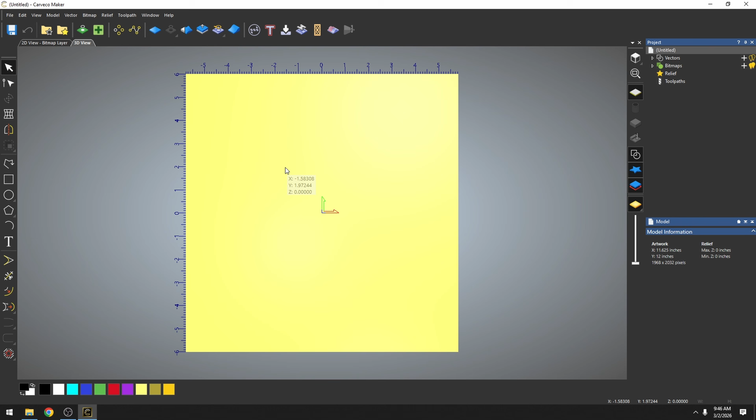Now we're just going to import our 3D model. To do a two-sided carving, you have to use a model that has two sides, so you're going to be importing something that has two sides or is a full 3D model, like something you might use for a 3D printer. Just going to import our relief.

Okay, and then when I import my model, this particular model came in standing up. I'm just going to hit this little material back here so we can kind of see. Now these are all the sizes down here. We're going to have to sort of rotate this around.

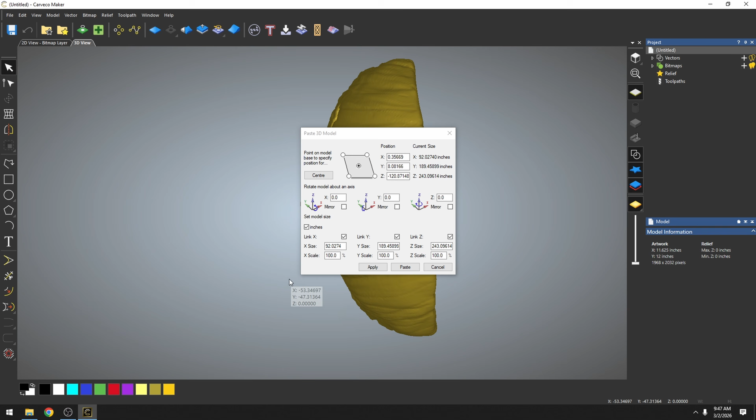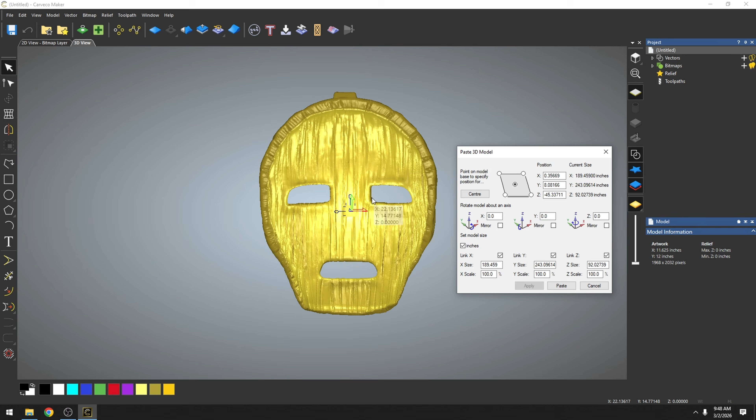Right now the model, if I move this little window aside, is standing up tall, so I need to rotate it around. These three boxes in the middle are going to allow us to rotate this around. The first thing we're going to do is rotate this 90 degrees on the x-axis, and now 90 degrees on the y-axis, and that flipped it over. Now what I want to do is flip this all the way over, so let's go 180 degrees.

Now what I want to do is start to size this down to our material. So we're going to go to our long edge and put in 12 on the y-axis, and I'll just hit the center button so we can put this in. Now my mask had a very specific size -- it's going to be 8.5 inches tall.

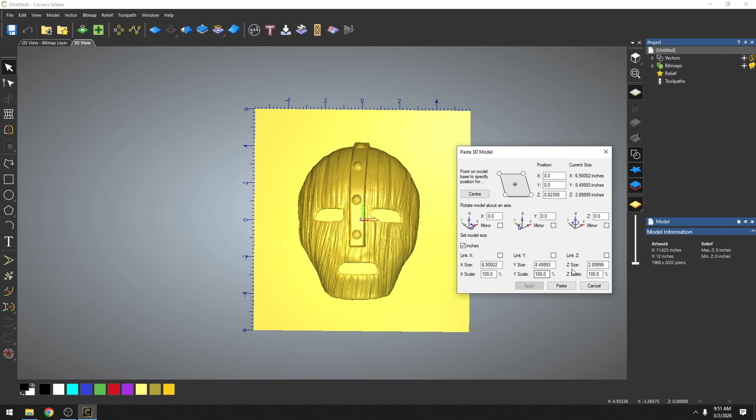And I want to uncheck these boxes. I'm going to make it 6.5 inches wide, and we're just going to be under 3 inches, 2.9 inches tall. We're doing the 2.9 so that it will fit inside of our material.

Now it does look slightly off, so let's check this out. Let's roll this over. And indeed, our mask is not perfectly centered, or it's not perfectly aligned to the material. Well, let's hit the center button and we'll get it down. So it looks like we're going to have to do a little bit of moving or rotating. The first thing it needs to go is left and right, which is the y-axis.

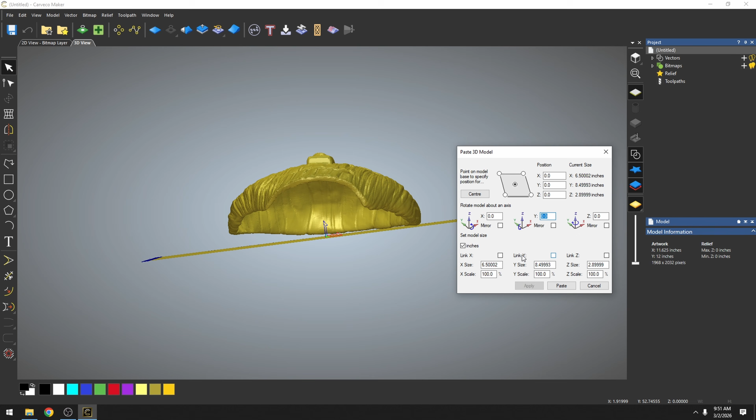Let's try some really small degrees, like 2 degrees. You can see we're rolling it around there. I need to come some more. Let's go another 2 degrees. We're getting it pretty even. It needs to roll down some, so let's use 2 degrees on the x-axis.

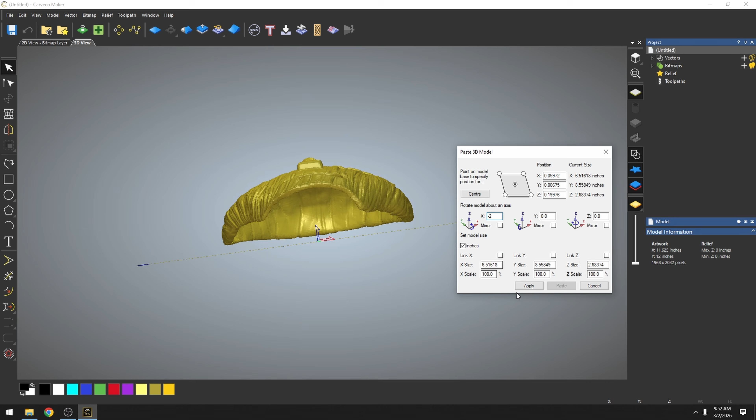That went the wrong way. We're going to use a negative -- negative 2 degrees. Let's go -4. Okay, let's do -2 some more. All I'm trying to do is flatten this out where it's sitting a lot more level. Let's hit our center button.

Now let's zoom in here. This is touching, and this is not, so it needs to roll this way just a little bit. Let's try 1 degree -- we're past it here and we were over here. So let's go back and I'm going to put a -0.5 degree and let's center it. We're almost down here, we're touching over here.

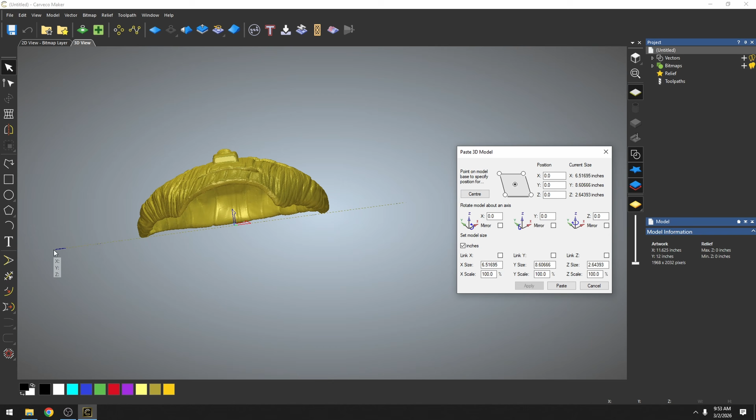So let's do half of that. Let's go -0.2. Center. We're touching here, we're not touching here. Let's go 1 degree -- 0.1, 0.1, center. Touching here and we're touching here. So that's how I know that this mask from left to right is about as centered as we can get it. You can kind of turn it this way.

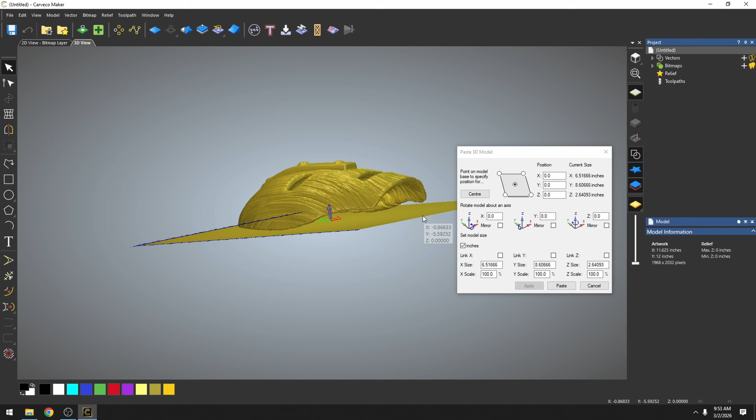Now what I'm going to do is try to get this a little bit flatter by making this touch. So we're just going to adjust this a little bit. Let's go with 0.01 -- I didn't even see it move. Let's try that again, 0.01. Let's try 0.5, let's go just a little bit more -- 0.2, another 0.2, and let's hit our center button.

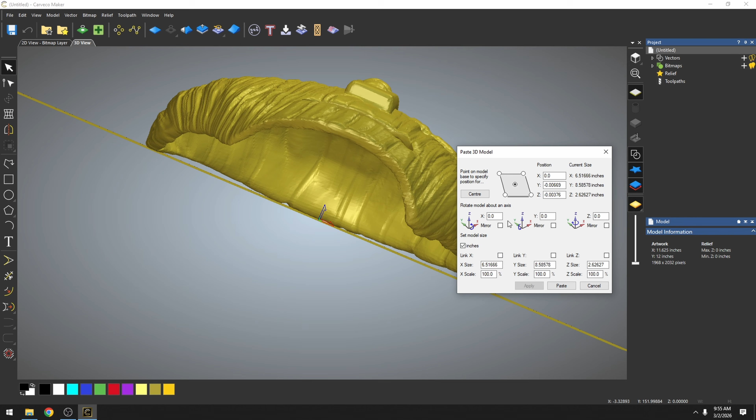So the back of the mask is touching and the two sides of the mask are touching, so I feel like I've got this pretty centered. It's sitting on about as flat a plane as I can get it, and so we'll carve one side and then we'll be carving the other side to match. Okay, and then once I've got this exactly where I want it, we need to go back over here and make sure that our sizes are correct.

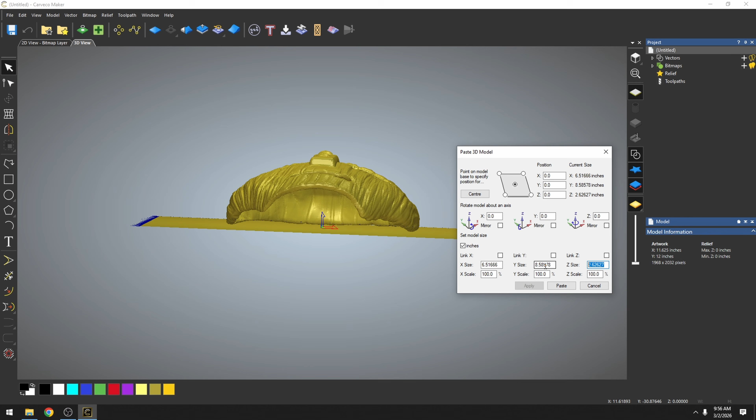This needs to be 2.9, 8.5, and 6.5. Make sure we're still touching. Now everything's the correct size and we're all lined out for our model. Guys, I'm just holding my middle mouse button down to roll this around in case you were wondering how I was doing that. Now what I want to do is paste this down.

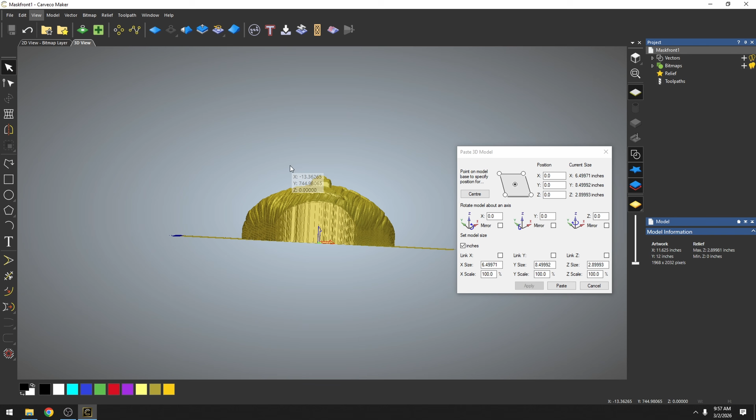Now we're going to leave this box open. We're going to go up here and we're going to hit Save As. So I'm going to go to File, Save As, and we want to title this Mask Front. We'll save that. And now this is Mask Front 1. Now I'm going to leave all this open. I don't want to change anything just yet.

Now notice when I pasted that down that all of the undercut stuff moved down and we made a solid model out of it. Okay, now what we want to do before we do anything is move right up here to our Reset Relief, and we're going to completely erase the relief that we pasted down. So now that we've completely erased it, we've got our mask floating again.

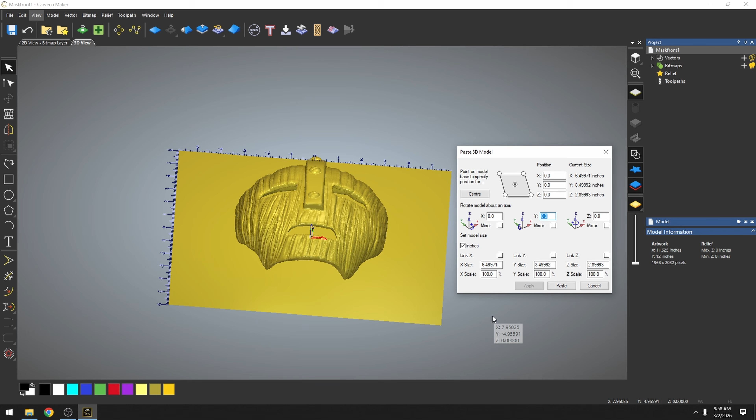Now basically all I want to do is flip this over 180 degrees. So we're going to go right here to our Y-axis and we're going to do a 180 and we're going to hit Apply. And that's going to flip it over in the exact same spot that we had the other side. So it's at the exact height and the exact thickness as the other side.

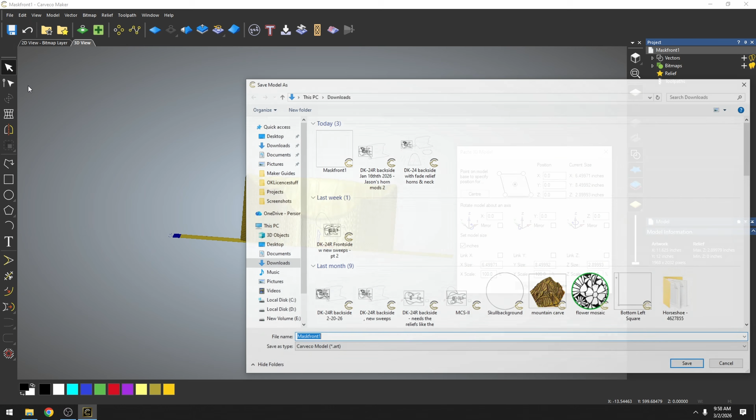Now I'm just going to paste that down, and now we're going to go up here to File, Save As, and I want to title this one Mask Back. So now I have a file Mask Back and Mask Front, and I can close this. And now I have my two files. I have the inside of this mask that we're going to carve, and then I have the outside of the mask that we're going to carve.

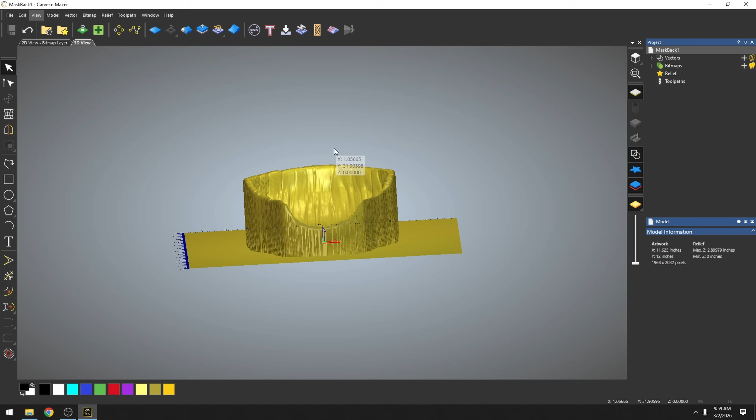And this is set up for a very thick, 3-inch thick piece of material. I'm going to be using some extended reach bits, and we've got some different things set up to make this work correctly. I'll be showing you how we mark the two sides when we get out to the CNC machine. And now we're ready to set up our toolpaths for both of these sides.

Generally, the rule for CNC is inside out. You always want to carve from the inside outwards, mainly for stability issues. If you cut the inside first, you have the outside of your material to hold your project in. If you start cutting from the outside in, you're cutting away all of that support as you're moving towards the middle, and it's a lot less stable. So it's always a good idea to carve from inside out.

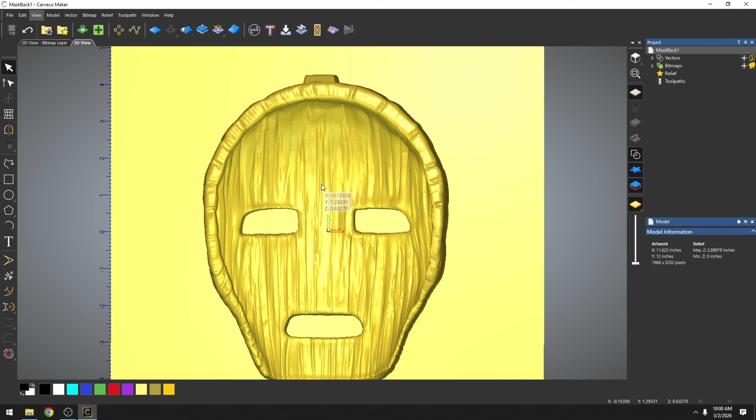And so for that reason, we're going to do the back side or the inside of this mask first. Then we're going to toolpath the other side second. Okay, in order to toolpath this, we need a vector that goes around our project. So we need to create those vectors.

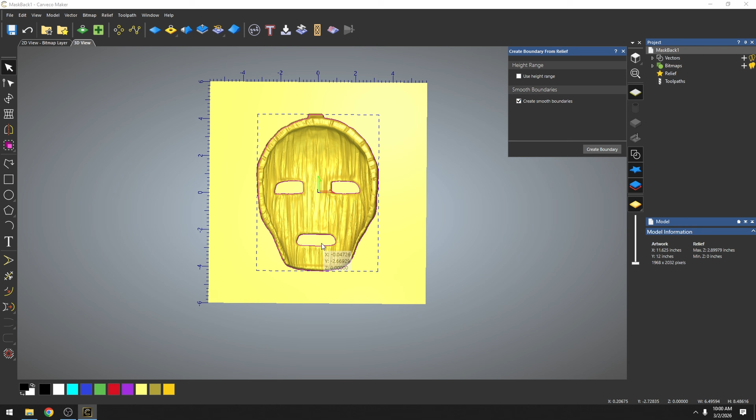We're going to use our vector create, and we're going to go right here to relief boundary and get our relief boundary tool. And I don't want to use a height range, and we do want to create smooth boundaries. So I'm just going to create those boundaries, and it's going to give me a vector around the eyes, the mouth, and the border here. And that's what we're going to need.

Now, if I were to carve this from this outer vector in, and then I flip this over and carved from the outer vector on the other side, it would only be held in by whatever material is between this outer vector and the sidewall. So it would probably cut it out if we tried to do it that way.

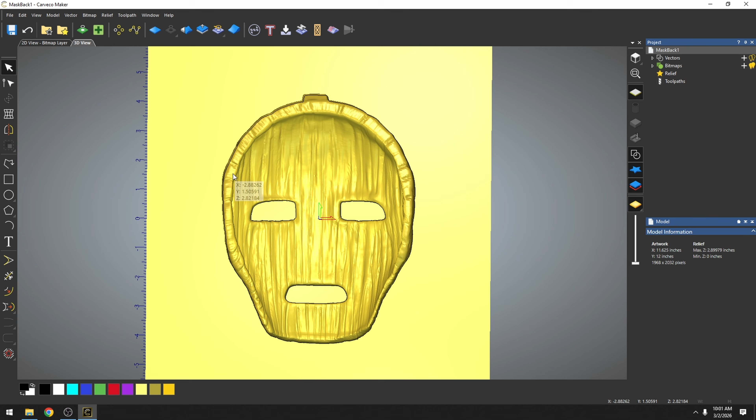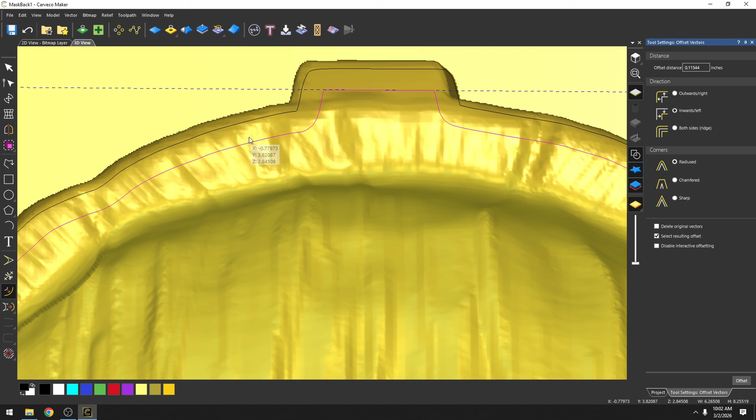So what we need to do is offset our border vector inwards so that we're carving all of this stuff except a little bit of material that we're going to leave around the edge of the mask to actually hold this side in. So I'm going to use my offset vector tool, which is right here, and I'm just going to grab this line and pull it in a little bit, about that far, and this is going to leave a little bit of material between this vector and this vector that we're not going to carve.

Okay, the first thing I want to do is I want to create pockets for these eyes. So I'm going to highlight all three of these. We're going to go to our toolpaths, and I'm just going to use an area clearance.

I'm adding an extended reach bit. We are going to change the speed of this pretty slow, 40 inches a minute. The reason that I'm going so slow is because of how long these bits are. This is a 4-inch bit with a 3-inch cutting area. There's a lot of deflection on these long bits, and so you have to go really slow in order to keep them from breaking. We're also going to slow down our RPMs because of that.

Our finished depth, we want to go all the way down. We're going to go down the full 3 inches using offset starting from the inside. I am going to use ramping. We need to set up our safe Z and home Z. My safe Z is going to be 0.1. And because this is a really thick piece of material and I have to have my router moved up, we can't have very much Z height. So I'm just going to be using a 0.5 or a half inch for my home Z. It's really low, but that's because of how thick this piece of material is.

We want to cut this from the top and leave anything excess at the bottom. Anything down here is going to help hold this in when we cut it out from the other side. This is also going to add thickness between our 2 layers. If you make your model smaller than your material, you can add more material down here and actually make whatever you're carving thicker. So this is a good way to blend the 2 sides to know which one's going to be thicker. We're just adding 0.1 material that's going to be in between the 2.

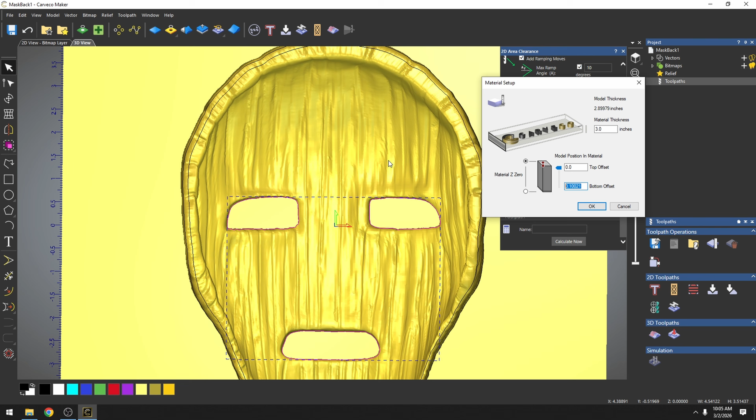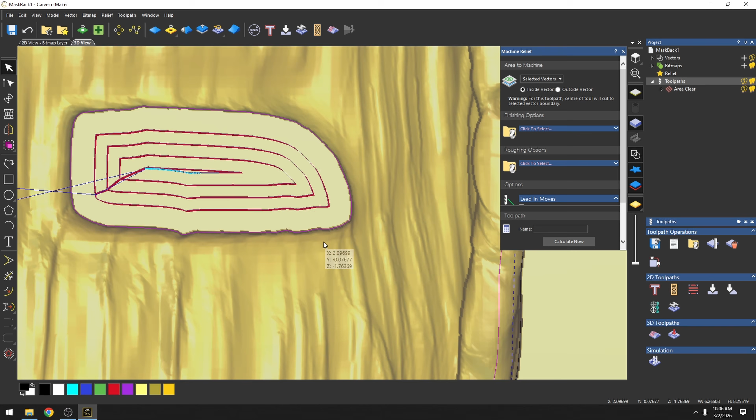Pressing OK, and now I'm ready to do those area clearance. And we're just going to cut those eyes and mouth out because I don't want to have to do that when I carve the rest of it. Okay, and now we're ready to go to our machine relief toolpath. We're going to be using our selected vectors, and I'm going to pick that vector that we offset towards the inside and the eye vectors because we don't want to cut the eyes. We've already cut those parts.

And for finishing options, we're just going to be using a 1/4 inch ball nose. And for roughing, we're going to be using our extended reach 1/4 inch bit. Again, I'm going to slow this down some and change the RPMs for this extended reach. My 1/4 inch ball nose is also an extended reach bit, but since we're not cutting that much material, it can go a bit faster. I want to do this in offset, starting from the inside. We'll let it cut both directions. I'm going to add ramping, and our safe Z and home Z is already set up, along with our material thickness. Okay, and then we just need to calculate that.

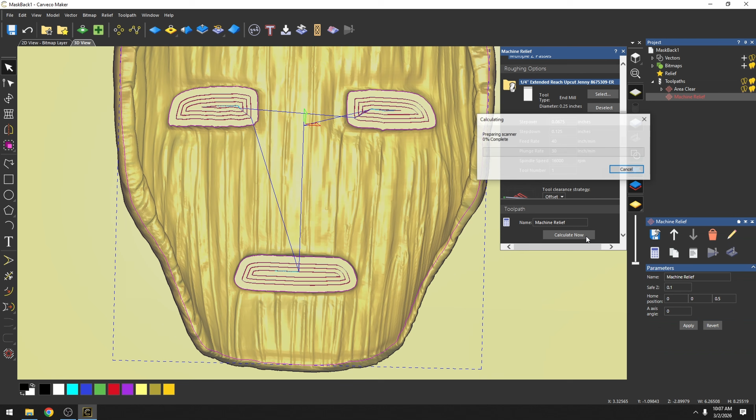And then that's going to complete our inside or back side of our material. Once we finish with this tool pathing, we'll be flipping it over to start cutting on the front side or the reverse side. We're going to go out to the shop and set this cut up and get this going, and then we'll come back and do the front side. I'll show you how to set all that up, and we'll tool path that after we get done with the back side. All right, I'll see you in the shop.

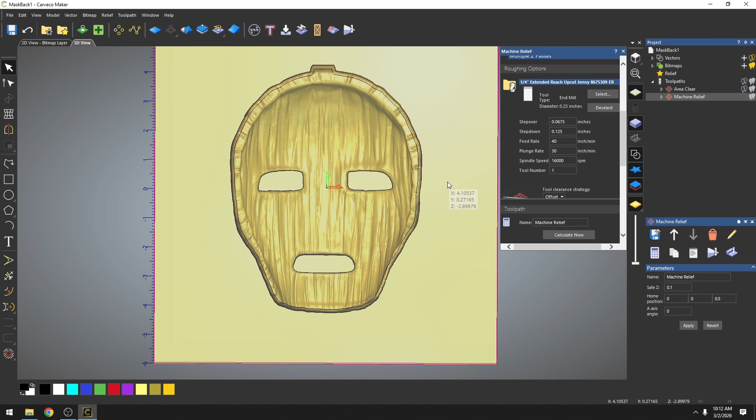Okay guys, we're out here at the shop and I have my piece of material set. We've finished measuring it and it's 12 inches by 11 5/8. I'm using this brass indexer. Basically, this just has measurements on it and you can set it. So what I'm going to do is set this at 6 inches and then I'll just make a mark in the middle. And I'll do it from both sides. That's going to be my center mark. We're going to do the same thing for the left and right, which is about 5.82. And then now I found my center.

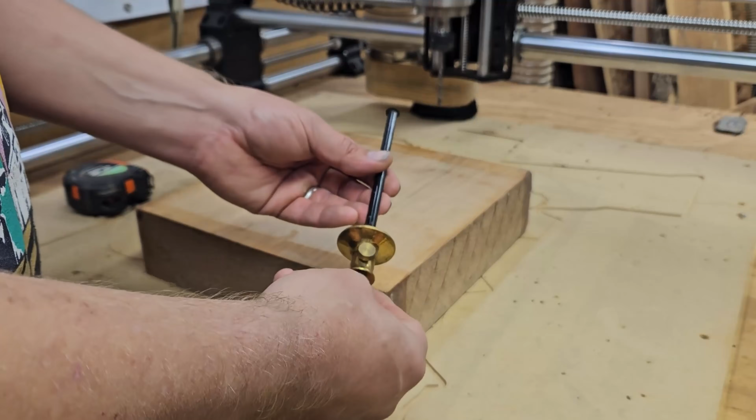Now that I have my center marked, the way we're going to find and mark our project for flipping it over, we want to put it in a pretty good stable spot. And I've got a bit chucked up now. This is my extended reach. This is that 4-inch bit with a 3-inch cutter. This is what we're going to be using to carve this piece.

Now what I want to do is check, make sure that my bit is going to make it all the way down. If I take this all the way down in the collet, I should be able to see that as soon as this gets down, my collet is just barely at the top of this material. Now I'm just using an end mill and I'm just going to be eyeballing the center of the bit into my middle spot. I'm just taking my wood and I'm just going to center it up as best as possible here. But I'm going to lock it in with some other pieces of wood, some cauls around the side of it.

Just applying a little pressure, just going around the outside. Now I just put those 4 pieces of wood around it so that it can't move. And that's all I'm going to do, guys. We're not going to lock in anymore. That's all the pressure I'm putting on it. I've just got it locked in 4 pieces. It can't move. Now here's the trick.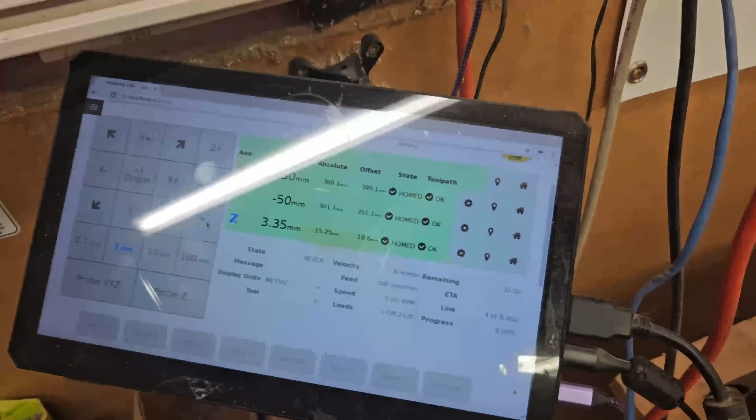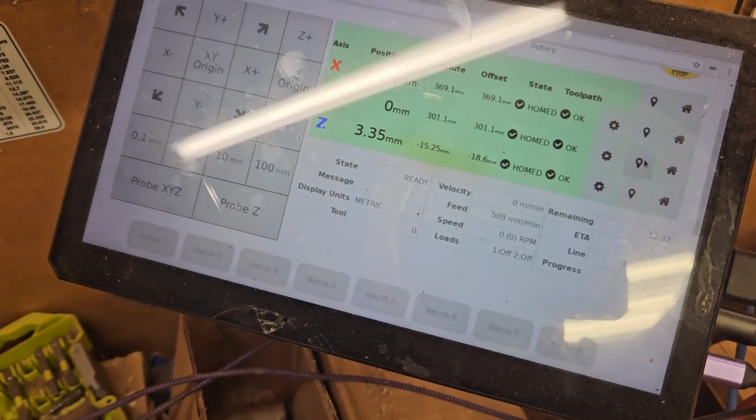I'm going to zero this out on the controller. Let's come over here to the controller. Hopefully you guys can see this. We're just going to zero this out. I'm not going to set my Z height yet. We'll do that shortly. We know that the material is 12 inches from front to back. So what I want to do is move the machine down half of that.

So let's come back over here. So I'm just going to move the machine exactly 6 inches. That's 6 inches. So I know that 6 inches is halfway. It's splitting the material here, half the bit. Now all we're going to do is turn the spindle on, and I'm going to cut down all the way to the base of the material. We're going to go slow.

You could use a drill mill for this. I'm just going to use this end mill because it's what I have. That's the thickness. Generally, you don't want to try to drill straight down with just a straight end mill because you can cause a fire that way. But if you go slow, this will work.

Now we want to go down right to where we get down to that base, so we got to be pretty careful when we get down here to this bottom. Just a little bit more. That's 2.96. Go just a little more. Maybe one more. Alright, and that's 3.68 on the controller. That's all the way through the bottom.

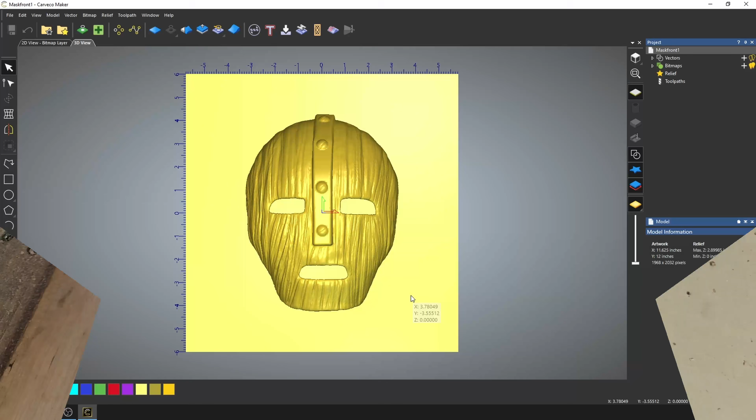Now that the back side's done, we're ready to toolpath out the front side. Now the first thing we need to do is create our vectors, and we're going to need to create vectors around the mouth and eyes and then around the outside. Again, we're just going to go back up here to Vector, Create, and we're going to use our Relief Boundary tool. I'm just going to press the create boundaries, and that's going to give us all of the vectors that we need.

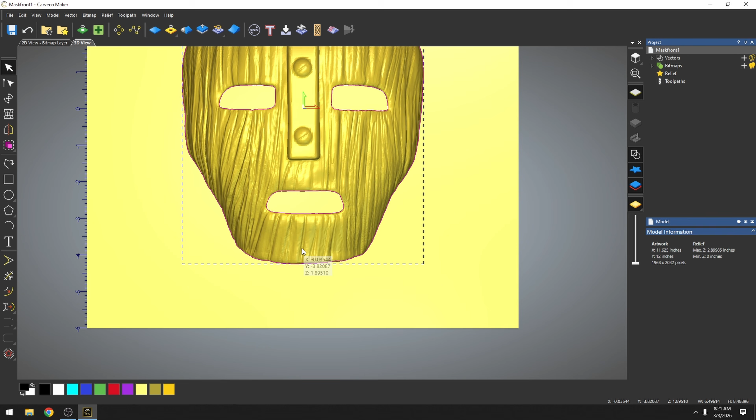I'm cutting this out in a 3-inch piece of material, and I'm going to use a 1/16 finishing bit. Now, that bit is only 3 inches long total, with a 1.5 inch cutting area. So if I use that bit, and when it tries to go down to cut these spots down on the side, because the bit's so shallow, the bit actually would hit the material that is around the edge.

So what we need to do is create a relief area or a small cutout spot where our collet is allowed to go down around the outside of this mask. So to do that, what we're going to do is create an offset from the edge of our mask.

I'm just going to go to my offset tool, and we're going to go outwards, and I'm just going to use a measurement. We're going to go a 1/2 inch. Let's make it a little more than a 1/2 inch. Let's go 0.6. I'm just going to get rid of this one. I want to make sure I have plenty of room.

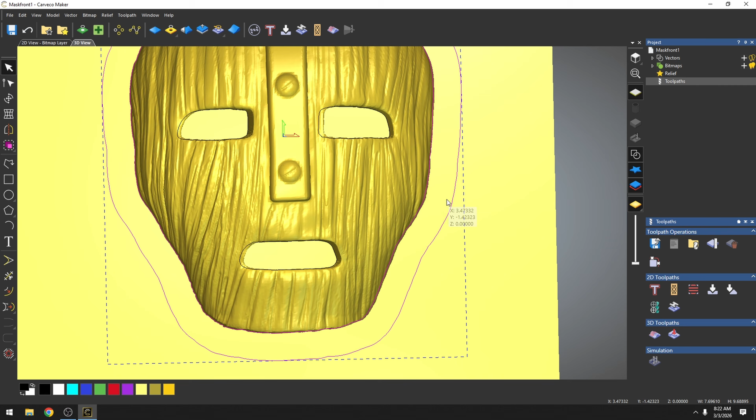So the first toolpath we're actually going to cut is this area clearance. And I'm just going to clear between this line and this line. And this is going to give us a recess area that's going to go down into our material. That's going to allow us a relief for the collet for when we want to carve deep. I'm just going to use my area clearance over here. We're going to go ahead and cut this one down 1 inch.

Yeah, we're going to use the extended reach end mill, mainly because that way I don't have to change bits when I go from this to the roughing. Just going to slow this down a bit. Offset from the inside. Ramping. Set up our safe Z and home Z. 0.1 for safe Z. 0.5 for our home Z.

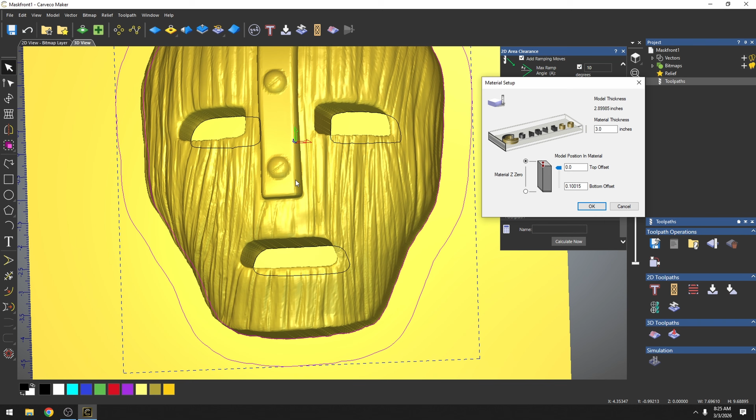Our material is at 3 inches. And again, we're cutting this from the top. We're leaving the excess at the bottom. For the two-sided carve, whatever we leave in the bottom is going to add to whatever the thickness of our overall mask is, or whatever we're cutting out. So I'm just going to press OK, and we'll calculate that.

That's going to give us our relief area down so that we have room for our collet to be able to move down and cut these areas. This is still outside the bottom of this part of the mask, so we're not even getting down to that. It's not going to affect it because it's outside of the mask itself.

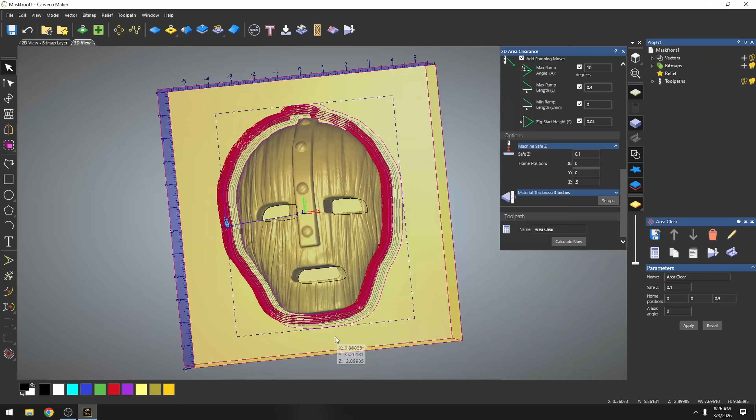Okay, and then our next toolpath is going to be our 3D machine relief. We're going to be using selected vector, and we don't want to carve inside the eyes or the mouth because we cleared those out on the other side using our area clearance when we did the back side. So those parts will already be cut out, and we don't want our bit plunging down to the base of the material when it went over the inside of these. So that's kind of why we're excluding all of that.

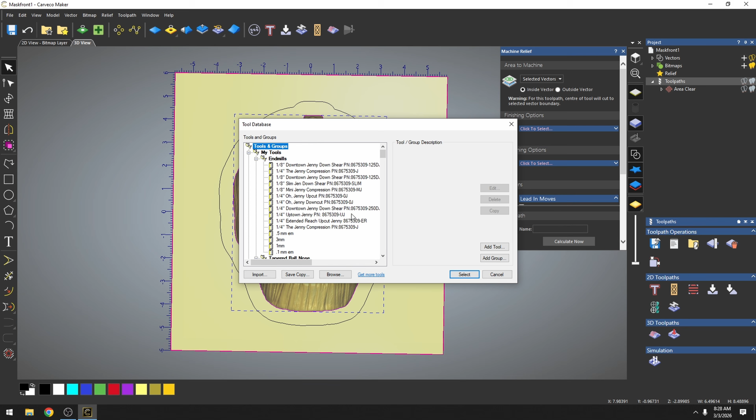I think we're just going to do the 1/16 finishing bit, and we're going to be using that extended reach end mill for our roughing bit. Starting from the inside, we'll let it cut both directions. I have ramping still on.

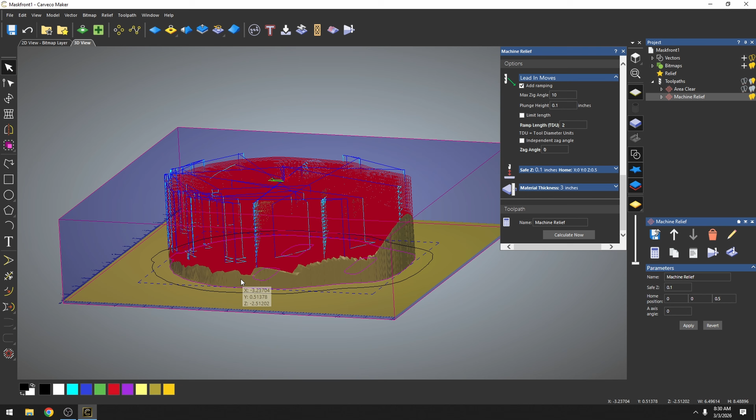Now, as I turn this to the side, you guys can see that there's a lot of stuff where the finishing bit and the roughing bit is not going to get along this outside edge. These are flat parts that just are straight down from where the vector is down to the base. So this is all straight sidewall here. So we will still have a lot of material holding this part in. And that's because we're using this inside vector.

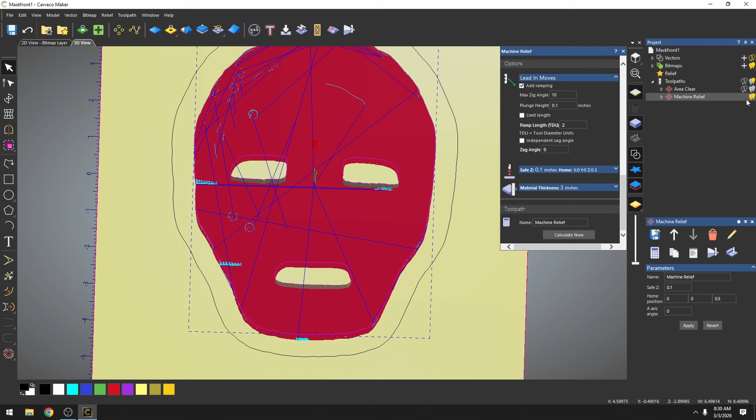Okay, and then finally, all we need to do is create a profile toolpath to cut this out. And we're going to go outside. We do not need sharp corners. We are going to finish depth at 3 inches. Now, because we cut down our relief 1 inch, we can add a start depth of 1 inch because of that area clearance that we put in. So there won't be any material around here down to 1 inch.

We're going to be using the extended reach, the 4-inch bit that I have, and we're going to slow this down. And we're also going to add some bridges, 1/4 inch by 1/4 inch. I'm going to hit the edit bridges button so I can put them where I want them. Put one here, here, here, and here.

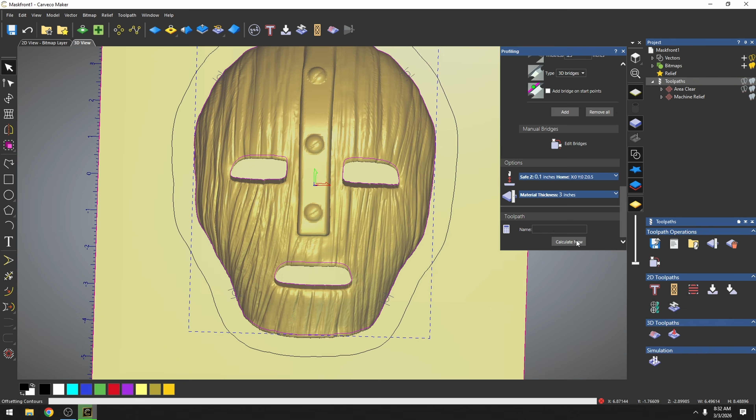And we just calculate. Oops, we had our eyes included, and I didn't really want that. So I'm just going to click off of this and reselect my vector and calculate again. And that's going to cut out our two-sided project. Okay, we're going to go back out to the shop. I'll show you guys how to flip the project over, and we'll go from there.

Okay, guys, we're back out at the shop. We've got the bottom side or the inside of this finished. And we're ready to flip it around. Again, we're just using the inside of these grooves right here. So what I'm going to do, we're going to move our spindle back to its origin position. And we need to change out the bits real quick.

Let me put in that extended reach bit, the same bit that we used to make the two marks. Give her a good tightening. Now we got a 0 off of our 0 plane here, right there. Let's move it back over to 0. Okay, and now I'm gonna move it the 6 inches, okay?

And we're just gonna go down with the bit. We're gonna go right down in that groove that we made. Okay, and now we're just going to undo the screws that I have around the outside of this.

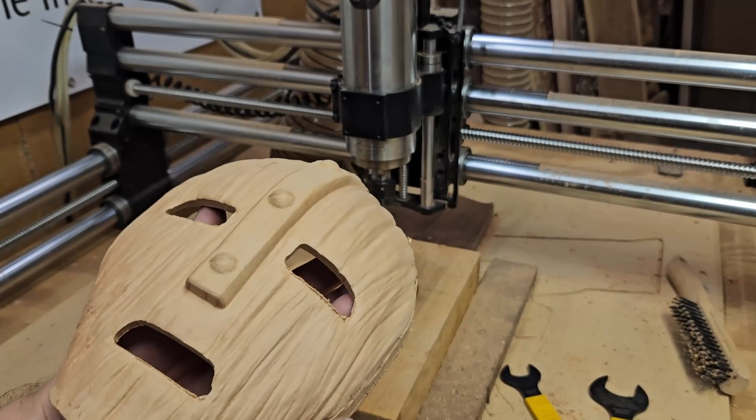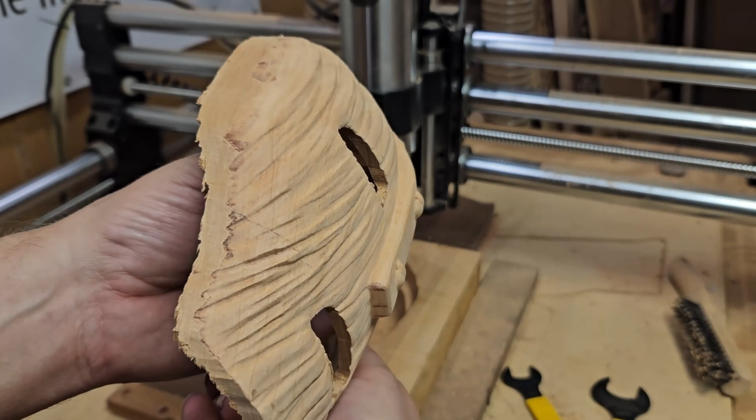Okay folks, right out of the machine, I haven't done any kind of sanding or modifying in any way. It's still rough. You can see there's just a little bit here that's going to need to be trimmed off. But it's pretty thin, so that's going to be able to be sanded. But the mouth and eyes and everything meet up really nicely. There'll be some sanding along the edges here. Yeah, pretty happy with that. And that's how you get a two-sided carve.